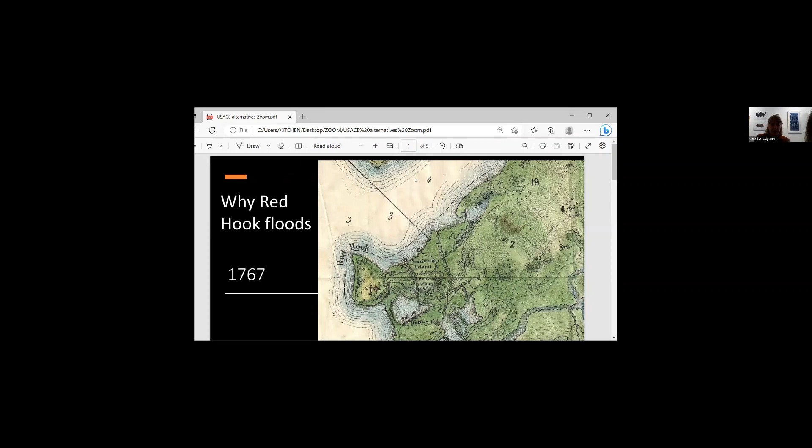So Red Hook was Lenape territory, settled by the Dutch just seconds after Manhattan, New Amsterdam. And this map from 1767 already has a bit of Dutch influence in that running right here, the Dutch made a canal because they used waterways. And they made some mill dams, but this shows you the amount of water within inland Red Hook.

But Red Hook's current shoreline has expanded. And so what this means is we're very low lying, and in some of these mill ponds, there was fresh water as well as salt water. So we are at risk of seawater flooding.

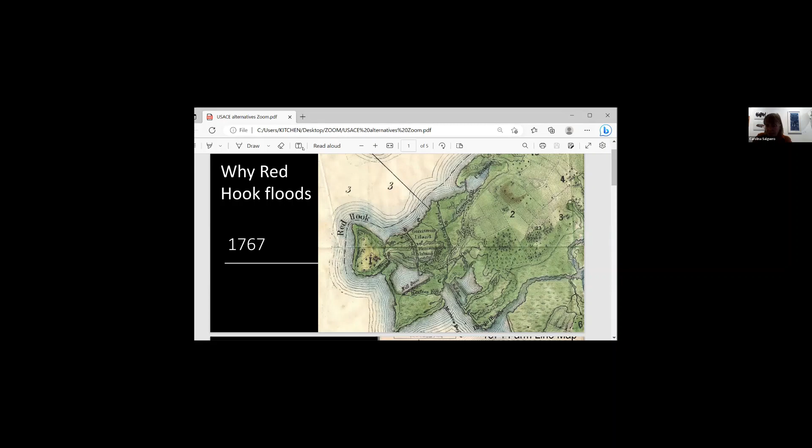And then here is actually, I'm not sure if they're seeing mine on top. No, I don't want them to see that. I just wanted them to see the PDF, which I've lost now. I'm used to working with two large monitors, not on a laptop. So this is

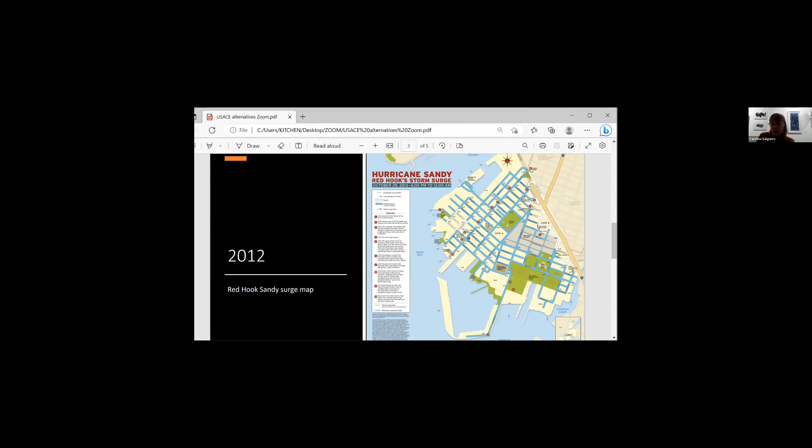So when Hurricane Sandy happened in 2012, everything that's blue on the street is what flooded. So the only parts that did not flood in the peninsula are this, the former Cypress Island, right here, and a little bitty spot right here where we had our Sandy aid station, Red Hook Initiative, right over here at the edge where the highway, the BQE, is.

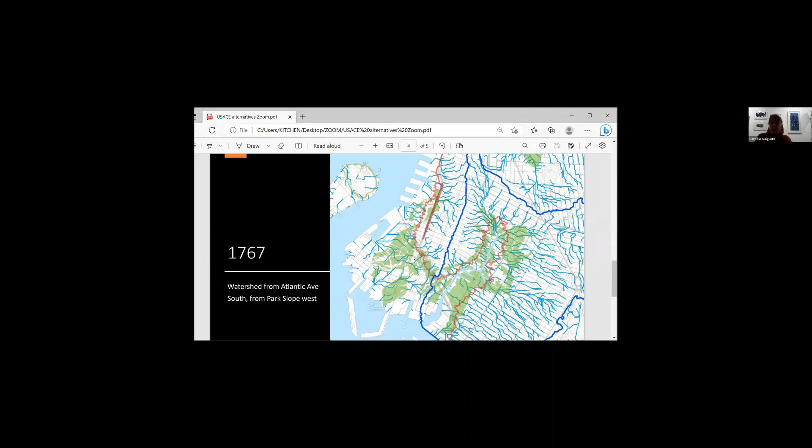Essentially, the whole peninsula flooded. Now, this here is a watershed map done by one of our advisors, Eymund Diegel. This shows all of the freshwater, or by his best estimate, freshwater streams in Red Hook. So many old timers know that Richard Street used to be a stream. Basements in Pioneer Street have flooded for a long time. Coffey Park was a pond until 1880 something. So those are freshwater issues.

And then here we have the sewer shed, the blue line. So if people are not familiar with the term sewer shed, like a watershed, it represents the network of where the water, in this case man-made pipes, the water routes are. Red Hook being at the bottom of the very high hill that characterizes Park Slope and a whole part of Brooklyn, the sewers are designed so they collect the water up there. It comes flowing down to the Gowanus Canal, where a lot of it emerges. But when there's what they call a rain event, heavy rain, then it comes down to Red Hook.

The city had planned to have a wastewater treatment plant in Red Hook, which is why this big pipe comes down here. The community fought it, and so now the sewage is pumped up to the Brooklyn Navy Yard, up the shoreline. And what this means is that Red Hook is at risk of flooding from all different directions. So we have the seawater that comes in from the sides. We have the rainwater that comes from above, with climate change heavier and heavier rains. We have groundwater that can come up from underneath. And then we also have the sewage water.

And so when there are these big events, there are actually geysers of sewage that come up in some locations in Red Hook. During Sandy, the sewage burst into people's homes through the toilet. And I spoke to someone in maintenance at our public housing here in NYCHA, New York City Housing Authority, for those of you who are not local. And he told me that groundwater came up into the NYCHA development for 4 days after the storm. So that's some idea of our risk.

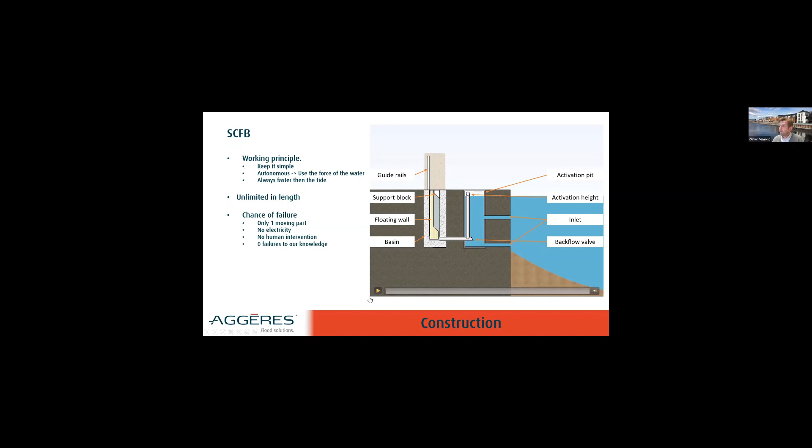So once the water starts moving, as long as the tide remains between safe margins, nothing will happen. At the bottom here, there is a non-return valve, so the water cannot enter the system when it's not needed. But we designed a prescribed height at which the barrier should be activated. So once the water only exceeds by 1 centimeter or one inch, the whole system will flood from the bottom and the floating wall will rise.

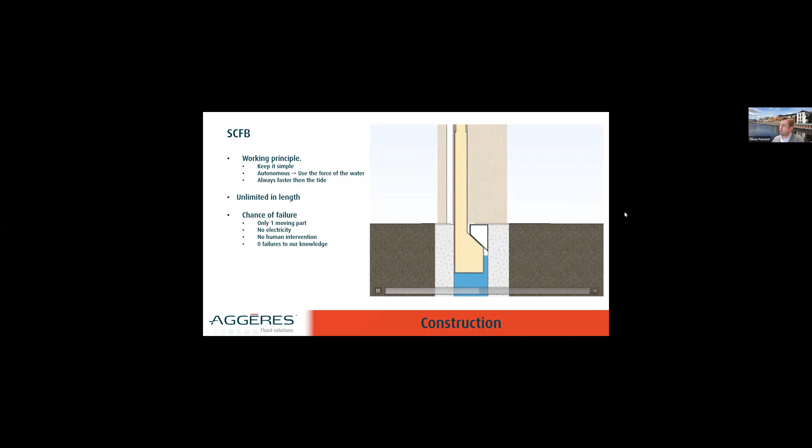The mechanism of the floating wall, it's hinged at the bottom. So all the forces that are exerted by the water are directly put into the foundation at the bottom. That means we can design if the barrier is 1 meter in length, or it's 100 meters, or a mile in length; it can be designed as long as you want it to be.

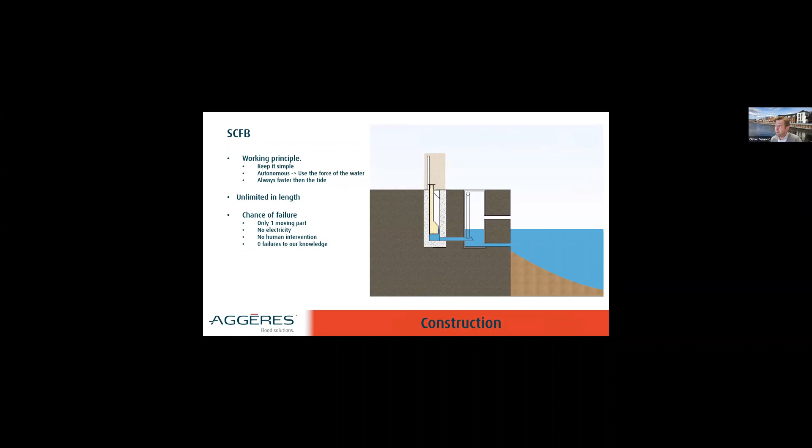And the best part of the system is we only have one moving part. So we get the lowest chance of failure. We don't use any electricity under normal circumstances. There is no human intervention. Nobody has to push a button. So you exclude all the parts that can lead up to failure of the system.

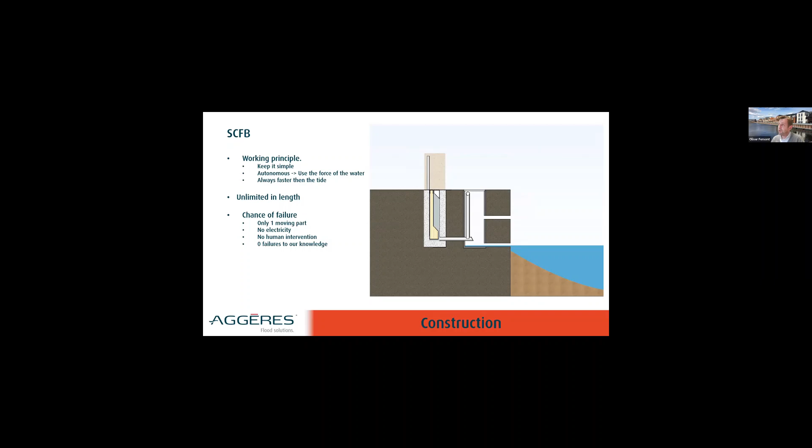As you saw in the diagram, once the tide recedes and we go back to a low water, the barrier itself will lower because it drains, and we'll go back to sort of a reset and be ready for the next high tide. So we have standard heights; up to 6.6 feet are more or less the standard heights. But we've done project calculations where we can build the barrier system easily up to 13 feet.

It's a composite wall, so the floating element is in composite. It's a glass fiber foam core composite. And it's usually location-specifically designed. One of the rules, more or less, is that its depth into the ground is more or less 1.5 times its retaining height. So when you've got a 1 meter high barrier, we go more or less 1.5 meters into the ground. Most of the material used is very durable, and we design the barrier for long lifespan.

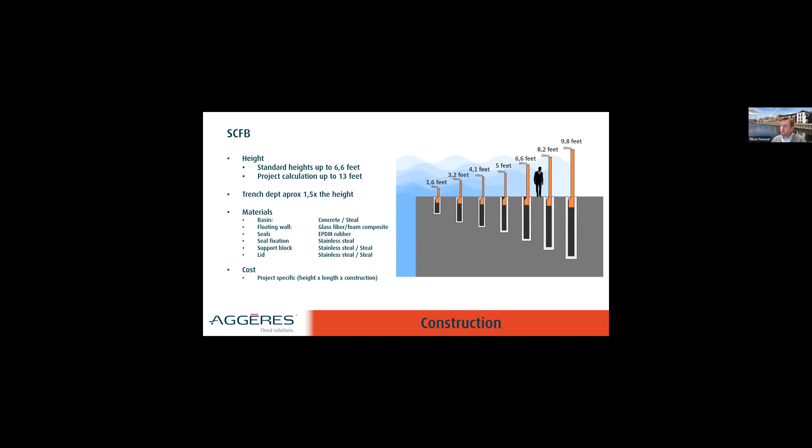The costs, we get a lot of questions. What is the cost of a barrier system? But it's highly dependent on the height times the length of the barrier, and what other works will be done in the region. So even if you have a fixed concrete wall, you also need a foundation for that concrete wall. That concrete wall also will go deeply into the ground. We just changed that concrete wall for a basin system where we put the flood wall in. So it's difficult to compare to other solutions.

In our current projects, we designed the system for 100-year plus design life for most of the parts. So for the basin in concrete, we take 100 years. The floating wall is in composite because it's 99.99% of its lifetime underground with no UV light from the sun. We can guarantee a very long lifespan, and most of the other parts are usually in stainless steel with a long lifespan. Only the rubber seals and valves need to be looked at and probably changed every 20 to 25 years.

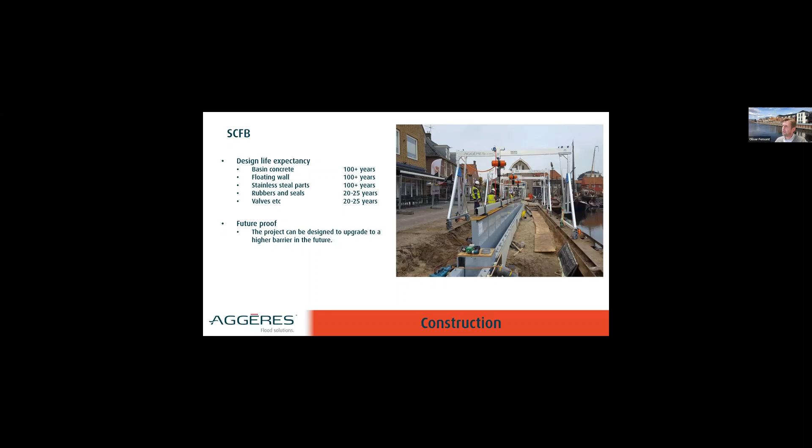For future-proofing a system like this, we can design in different factors. We could imagine that from now up to 2050 we need a barrier that has a 6 feet high retaining height, but after 2050 we would have to go up to 9 feet. In that case, we can already design the concrete basin for accepting a higher wall in the future, so that in 2050 you could take out the lower wall system and put in a higher wall system without having to redo the foundations and the basins.

We've been working with the product for quite some years. We have quite some experience. So we can deliver together with our partners most of the services. We start at the design and engineering part, where we do preliminary research and cost assessment, where we can go into BIM integrations, RAMS risk assessments, composite calculations, where we could actually do most of the work to see if it's feasible to put into a certain project.

From there, we can step up to do all the production works for the floating wall. Usually we do everything which is movable that we put into the ground, and concrete basins and all those things are usually done by local contractors, for which we will produce production drawings and all those things needed. Installation-wise, we usually do site survey, assembly of this floating wall and installation on site if needed. Maintenance: in Europe at this time, we have most of the maintenance contracts.

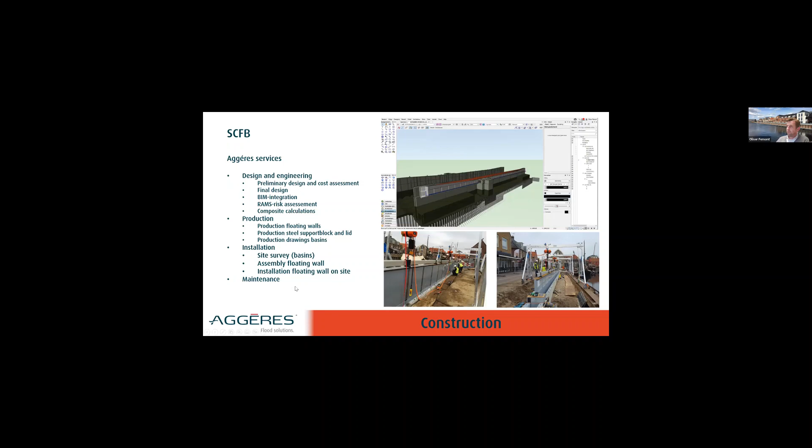Activation. So we designed the barrier to be activated by the floodwaters, but that's not the only way you can activate the barrier. It's actually pretty easy to just fill it with any water which is at hand. So it can be easily filled by, for example, the fire department, by just pumping water from the canal or from any water body into the system, or to use city water to fill the system,

or push button operation if the client would need to just push a button and have the system come up. That can also be designed, always taking care that we don't get off the path of the basic idea, where a flood will always activate the system. So we have different options of activating the barrier, but the first option, where it's activated by floodwaters, still remains its latest redundancy.

In all the designs, we incorporate different redundancies, so we make sure that we have different water inlets. Those are all interconnected. So if one or two or three inlets would be blocked by debris, for example, from 10 inlets, we only need one inlet to have the whole barrier system come up and make sure that the hinterland is protected.

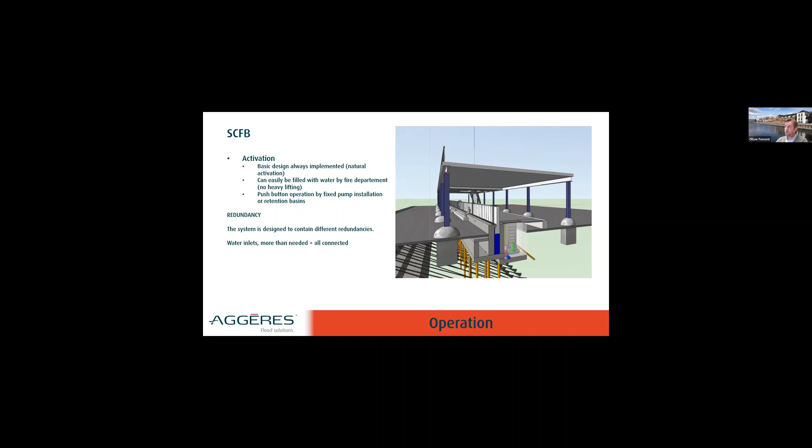Basically, we design the floating wall. It's a composite wall. It's designed specifically for hydraulic conditions that appear on specific sites. So most of them are tailor-made. Our standard elements that go into underground parking garages are usually designed up to more or less 2 times the pressure of the static water.

But for a current project we are designing, we're going up to 12 times the static water pressure, which is wave and impact pressure combined, up to 50 kilonewtons of force per meter, which is quite high.

Of course, what happens when something is on top of the barrier? Actually, the barrier floats. It works like a boat. So we can design the floating part, which goes into the water. If we can expect that there will be heavier loads on top of the barrier, we can just make a bigger flotation device, so it will be picked up.

Our standard barriers usually cope without problems with 75 kilograms per meter. So one person per meter can easily stand on the barrier and they will just go up with the barrier. But in some cases, you would like a higher lift capability, for instance, where you could expect that there would be light vehicles or motorcycles on top of the barrier. It can easily be designed to pick up higher loads.

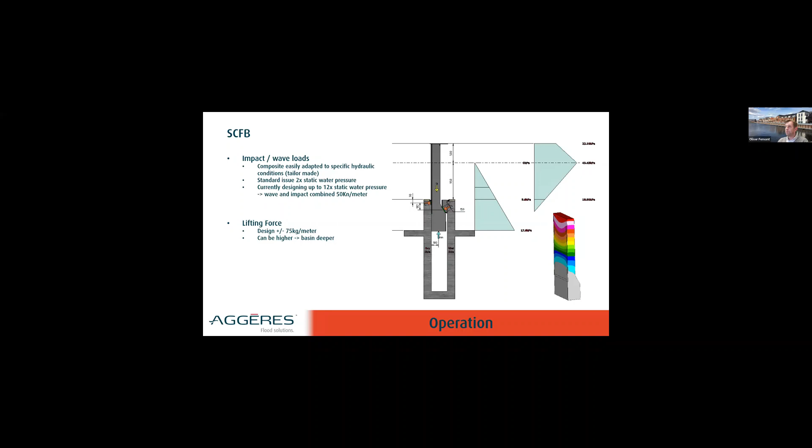I'm already at maintenance. So what's expected for maintenance purposes before a storm or activation would appear? Just a quick checkup actually of the lid mostly. So the barrier under normal circumstances hangs from its lid, and the basin is almost airtight, sealed from the surrounding.

But for instance, when there is a little bit of debris on top of the lid and the barrier comes up, and that debris would fall in between a crack, that could lead to a small leakage percentage. So it's best to make sure that the surroundings are cleaned. And we actually advise to do a yearly or after a flood maintenance inspection. That's usually just an inspection.

And as you see, the inspection is not much more than using a pump or a water hose to fill the system. It will just make the barrier float up. You can easily inspect the seals and make it go down again. The Spakenburg project is a 300-meter long barrier, and 2 to 3 persons can easily inspect and have the maintenance done in one day.

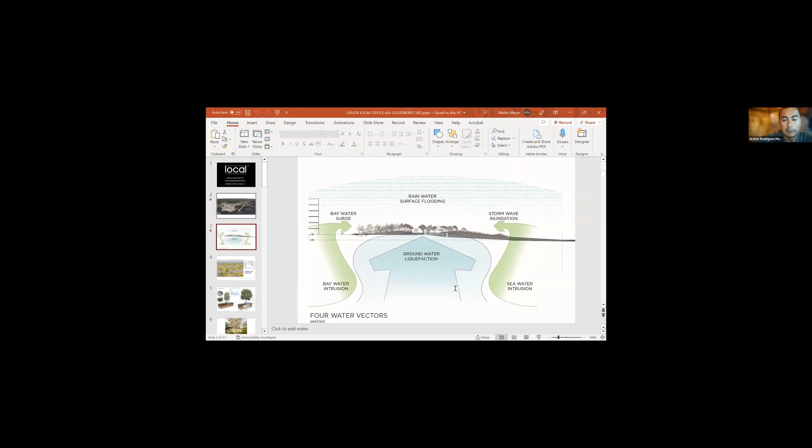I want to add, it's great to see the team at Aggéres present self-deployed barriers. I first saw their technology over a decade ago in New York City, and I'm still dumbfounded that it hasn't been built in any city in the United States yet. We need that technology. I know long-term maintenance is always a struggle in the United States, but we can overcome that. In fact, I've always introduced the idea of surge-powered barriers in the 3 coasts that our firm has worked at, and people get excited, but I think it's time to get some pilots going. So hopefully New York City is the place for that, especially in the Dutch history of Red Hook.

So I'm Walter Rodriguez Meyer, landscape architect and urban designer, owner of a minority-owned business, Local Office Landscape and Urban Design. And before meeting Catalina, what really got us in position to support New York City after Hurricane Sandy is Dan Wiley, who's on the call, who represents Nydia Velázquez's office.

Back in 2007 or 8 or so, Dan and Nydia brought some of the work I'm about to show you to the Congressional Hispanic Caucus, and our firm was awarded Innovators in the Green Economy, and from that time on, it really helped our firm grow in Nydia's district and put us on the radar for the Obama administration once they got going. So I just have to say, I'm always grateful for what Nydia has done for our firm and for minority-owned firms in New York City.

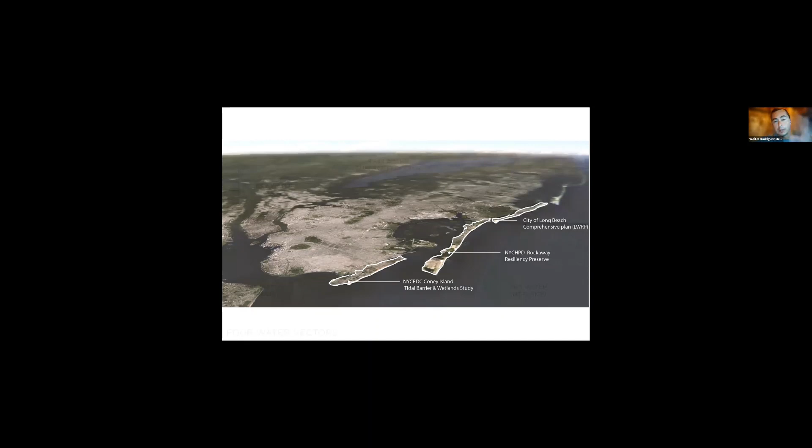In working in coastal zones, whether it's Red Hook or in the Rockaways, it's always a challenge to deal with the confluence of what happens when it rains and you have storm inundation. And that's water from the sky, fresh water and salt water coming together at the same time, which happens during some events such as hurricanes and storm surges. And so one of the challenges is really groundwater management, because the groundwater will rise up because it's fresh water. It'll rise up more rapidly than the salt water because it's buoyant and floats on top of it, especially in the subsurface.

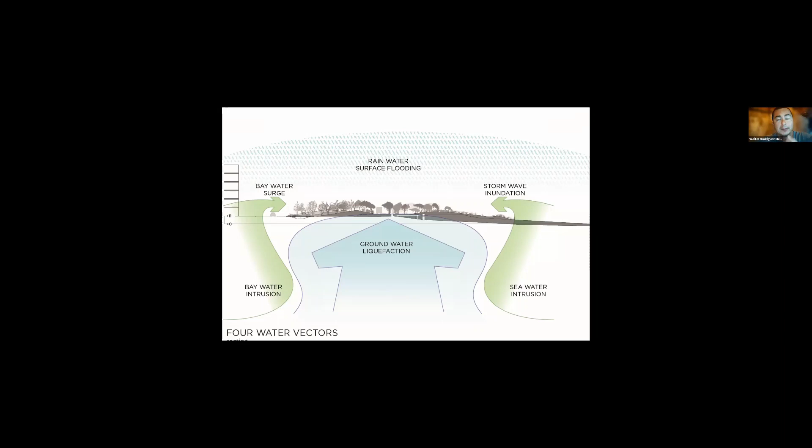And a lot of our coastal zones are very porous. We have very porous geologies in Rockaway with sand, and coastal zones of Red Hook. And so how can that groundwater be managed in a way that is consistent? The great thing is, 1,000 years ago, there was a coastal forest in New York that would lower the groundwater in the first few feet of the groundwater zone. So there was a check and balance system 1,000 years ago.

And so the challenge is, how do we take the way we plant trees today and bring back that check and balance between groundwater and trees? How was groundwater lowered? It was through evapotranspiration. And so evapotranspiration is when the hotter it gets, the more the trees pump water from the ground and help cool the urban heat island effect above.

And so, knowing this knowledge, there are ways to design our soils so that we can supercharge that relationship from 1,000 years ago and actually have our urban forests be supercharged in a way that can handle stormwater, groundwater, and create roughness and surge in ways that is even more improved in performance than that forest from 1,000 years ago.

And this data is based on a few reference points. The USGS has noted that a mature tree can put 109 gallons per day from the groundwater into the air, but that's mostly temperate trees.

Now, we've learned in the tropical environments, with groundwater sensors placed in the tree islands of the Everglades by Florida International University, the groundwater is lowered by 1/4 inch to 1/8 inch per day, which doesn't sound like much, but when you add this up, it starts to add up to millions of gallons per day when you have a forest that works in this way.

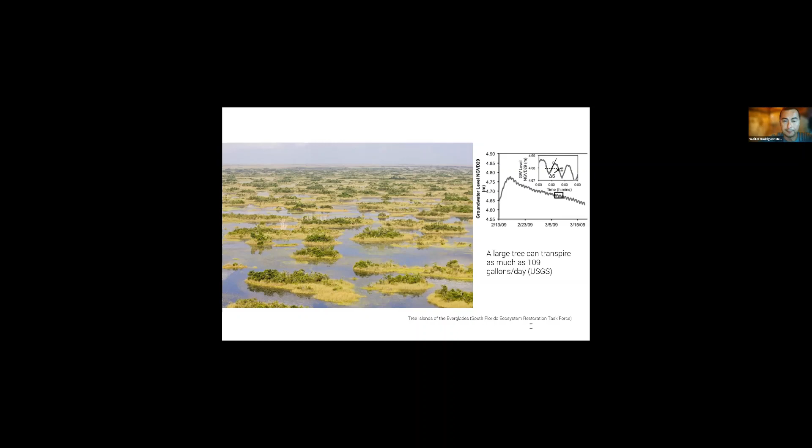And so the way we plant trees today, kind of on the left, it creates some hazards in the urban environment. When trees knock down in storms, they lift up sidewalks, they create disaster recovery budgets that get blown. And most importantly, the trees are not connected to each other and they're not connected to the groundwater.

Whereas on the right side, if we design our structural soils in a way that are hydrologically connected and networked to each other, trees can hold each other up by connecting to each other in winds. They can share nutrients and they can lower groundwater as well as cool the urban heat island effect at scale.

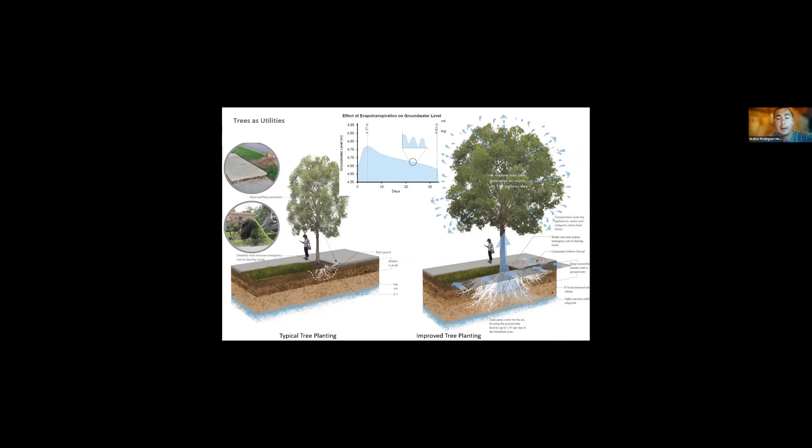And so the good thing is these cloudburst strategies are being built by the city in the future, and it's happening in higher elevations in New York City. So the DDC and NYCHA are starting to deploy cloudburst contracts where they're managing extreme rains.

But the challenge is most of the green infrastructure guidelines for New York City require 3 feet of freeboard from the bottom of the green infrastructure to the top of the groundwater elevation. That means that you need a 5 to 6 foot freeboard between the street level and the groundwater, which basically eliminates most of Zone 1 of New York.

But my colleague from DEP, who works on these guidelines, John McLaughlin, has told me those are just guidelines. They're not regulatory. And yes, the city is working uphill with its pilots, but it'll start moving its way downhill.

And so some of the projects I'm going to show you now are pilots that have been built in New York that have been tested by extreme events of groundwater flooding and nuisance flooding, as well as extreme rain events like Hurricane Henri and Hurricane Ida that came through a couple summers ago.

This first project is on the coast. It featured a new urban dune forest built behind the boardwalk in Rockaway to create roughness and friction so that if the seawall and the boardwalk, which are designed for a 100-year surge event, are ever compromised, if there's a surge that came over the boardwalk, the forest creates another layer of protection and friction, as well as the topography.

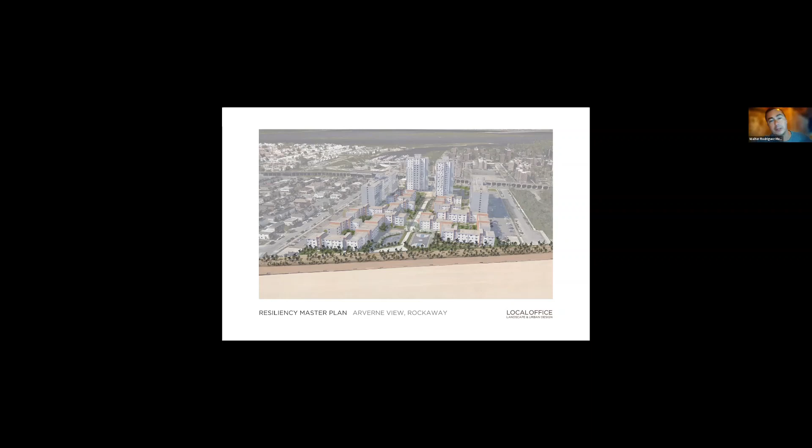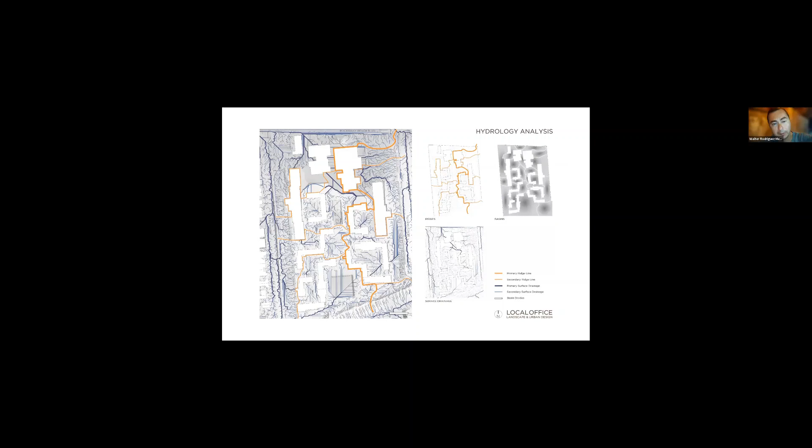But on these microsites, working at the multiple block scale, we run these heavy rain events and map where water goes and where it collects. And this tells us where the strategies for intervening go.

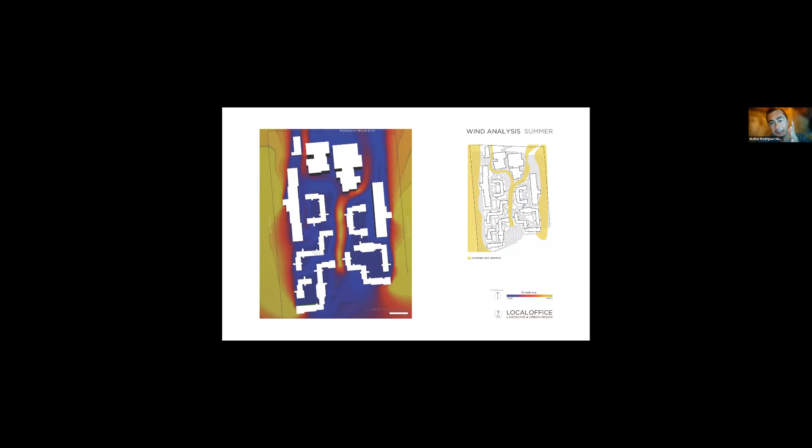Also mapping how we look at extreme winds from the summer versus the winter, and how that affects the existing landscape. Now, what we found on this project is the existing landscape was getting impacted by salt summer breeze that was coming in from the ocean. And without a healthy forest, you can't get these protection systems.

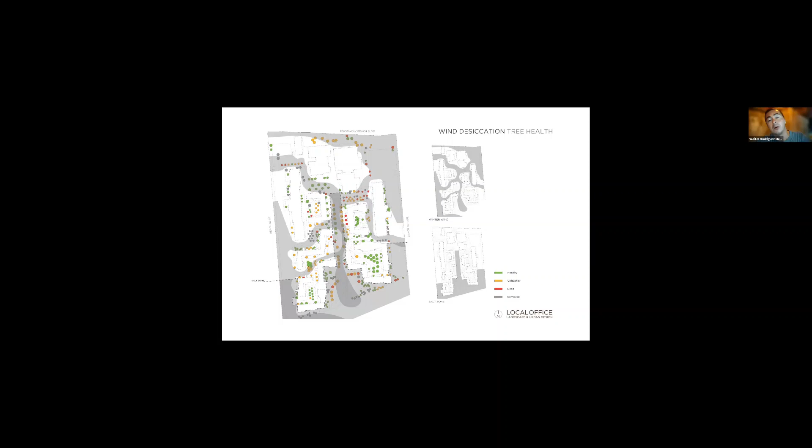What we learned is that salt was going much deeper into the blocks than expected. Also, the harsh northwest winter winds made it hard for senior citizens in these affordable housing complexes to get around in the winter.

And we had a lot of flooding and ponding that would harden up into ice. They had a double whammy here of wind and water. And this project was funded by HUD, federally funded. And this was a $4 million resiliency project. And this diagram you see here took all the vulnerabilities of the site. 4 million wasn't enough to solve all the resiliency aspects, but this prioritized.

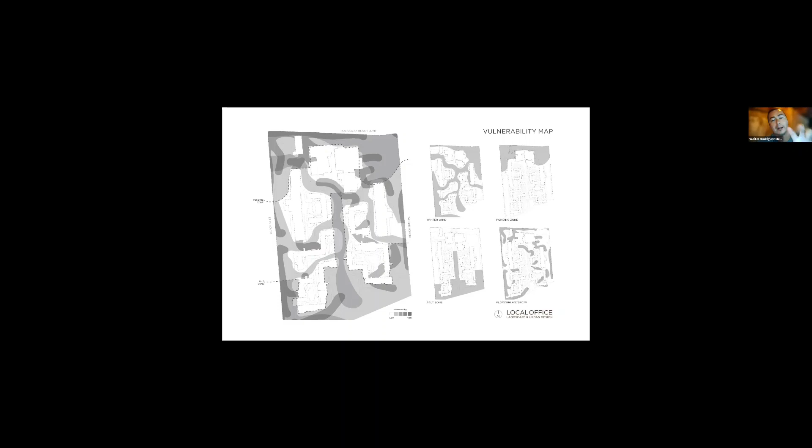And instead of landscape that frame views, we started to create a landscape that moved the wind area up so that that Venturi effect of high winds would get above the canopy and create dense plantings that also were coordinated with the security camera zones that are required for affordable housing projects. And then lastly, a new dune forest between the private property and the public investment from FEMA that was backstopped by the groin field that Army Corps is now finishing construction, but that was under the leadership of Tom Asbery.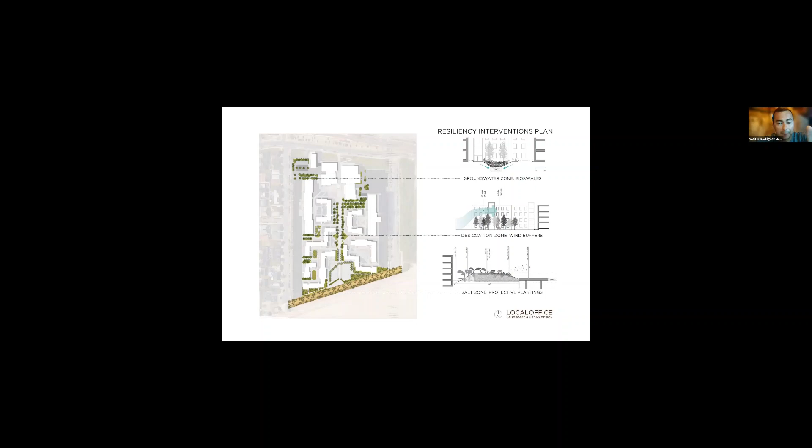And this is what that looks like. The flood management landscape is habitat driven, but it's 50% edible. Thankfully, a lot of the native dune species in New York City are edible species. And this is that dune forest. We work with the U.S. Forest Service to identify species that were native to the U.S. but may not have been planted in this region, to introduce them and document them.

So each of these are mapped with GPS points and monitored over time to see how they perform long term, because some species perform better than others in the face of climate change. There are new pests, there is extreme heat. So some of these species do well in the cold, but not so much in the heat. And so this variability is critical to see, but also not abandon native species and go with the simple invasives that work well, but create other problems. So it's really giving native species a chance and creating diversity as well.

This next project you can read about in Fast Company. And so there's a Fast Company article about Beach Green. Beach Green has become a model for New York City in two ways. You'll find it in the city planning waterfront comprehensive plan that was published last year. But it also was a model for New York City's Green New Deal. It's a built model for Local Law 97, which is Green New Deal. And this is steps towards net zero.

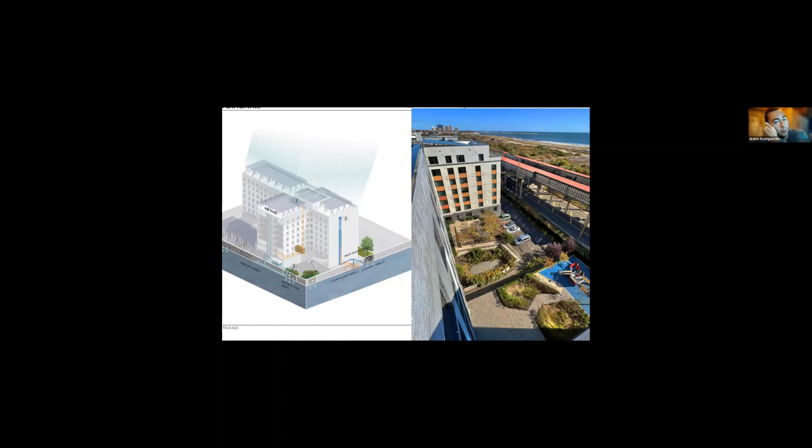So when there's walls to be built, you want to reduce wall linear footage with more natural infrastructure. And this is one of the approaches, is to lower the groundwater over time by not fully requiring pumps. And if there were future flood pumps, which is the case with the Rockaways, the Army Corps plan for the Back Bay includes pump stations as well as levees and walls. How do you take the load off of those pumps? By having the ecosystem take down the first few feet of groundwater during the growing season.

Also, playgrounds can be porous. Every surface can be porous. And there's a lot of ways to execute it aesthetically.

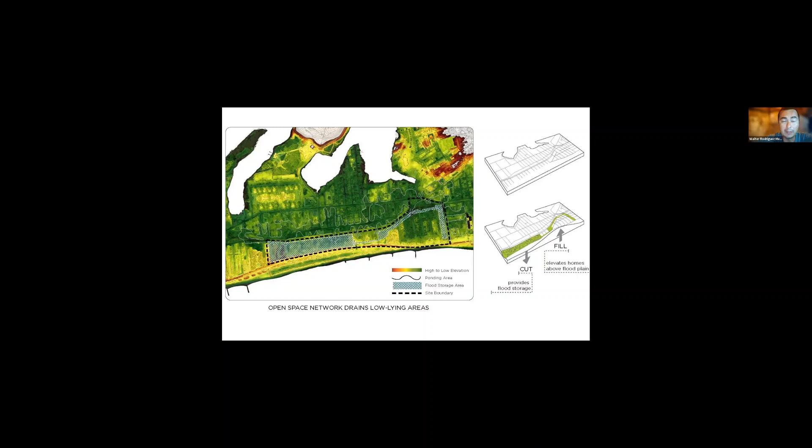And if you want to learn more about it, it's called the Ghyben-Herzberg phenomenon, G-H-Y-B-E-N, and Herzberg, H-E-R-Z-B-E-R-G. Our strategy was to leverage that asset and use the interdunal swales that would be constructed for this project. This is a whole neighborhood in New York City that uses a preserve to become a sponge in a way for the whole neighborhood that exists, as well as a future neighborhood that's being built for the project.

This is a really important detail, because if you look at this on the bottom, you see Army Corps, you see Department of Parks and Recreation, and you see HPD and future grants. This is our big takeaway that we're leaving for the team here, for electeds, for Dan's office. I know Dan is not your district anymore with Nydia, but for Dan Goldman, when he activates with his interface, and all the other electeds, this Army Corps piece that's being funded is one little piece of many other federal investments going on that are interagency in the Rockaways.

And to integrate the investments is critical, because then you start to phase them. So this drawing starts to look at that. Army Corps' investment on the beach that brought us the groins on the beach, and the Department of Parks and Recreation in the middle with the boardwalk that was funded by FEMA, and then future upland strategies that deal with rain. All this needs to be looked at in an integrated fashion that also takes into consideration the election cycles as well as the procurement cycles for the different federal agencies.

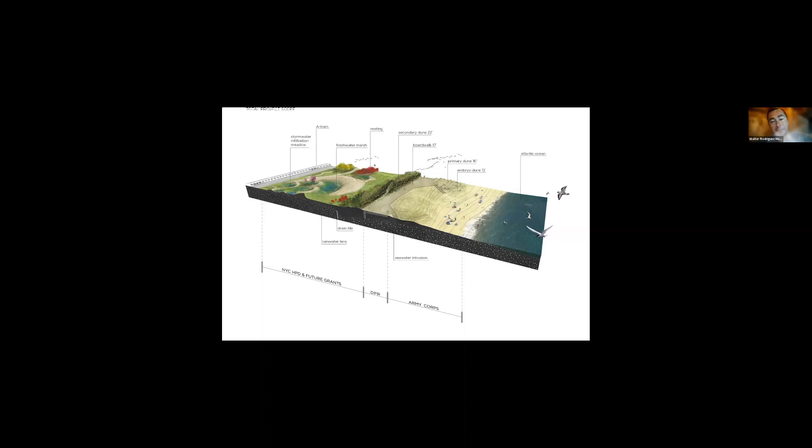So this project is called Arverne East. So it's 90 acres of New York City land that used to be bungalows that were razed by Robert Moses, the city planner. And so a lot of this was rehabbing old infrastructure or demoing it and building a new city. This is a net zero neighborhood, which means all of its energy comes from the site through solar and battery and geothermal district. We've been working with NYSERDA on the very first geothermal district at scale.

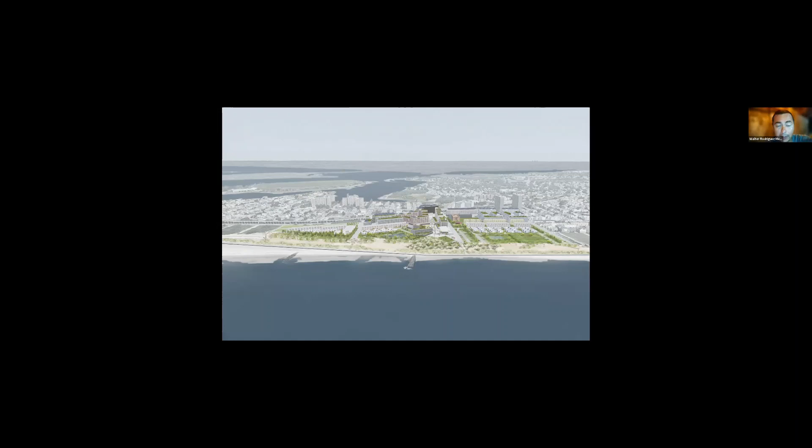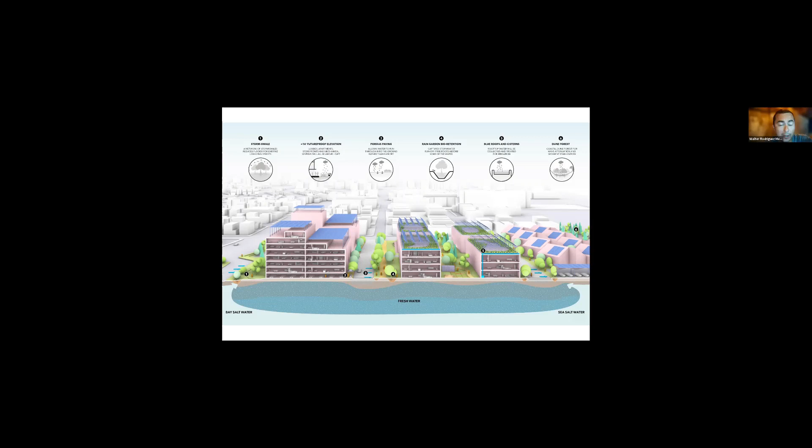And this is going to have a mix of affordable housing and home ownership, both rental and home ownership units, which is very exciting. And shovels are in the ground. It's now being constructed. And we have groundwater being managed at scale, at a whole neighborhood scale, all the energy from each site. So this is decentralization of groundwater infrastructure, decentralization of energy infrastructure. And you can read about this project in Bloomberg. Bloomberg wrote about Arverne East, and there'll be a link dropped in as well about the energy resiliency aspects as well as the flood resiliency aspects.

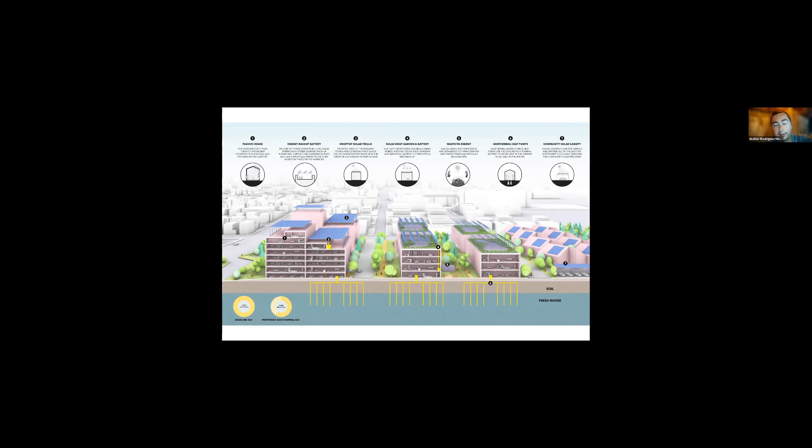This is a multi-billion-dollar real estate project, 90 acres of land. It's the biggest thing since the West Side Yards. But most importantly, it leverages things that already exist incrementally in Rockaways, including a circular economy of farms. This is a farm owned by a Red Hook resident, David Selig, and this is Edgemere Farm. And what's beautiful about this farm is that out in the Rockaways, where he's been doing a lot of work, food is grown here, and then a lot of the restaurants, some of which are Michelin listed, and they're known in Rockaway, are buying the vegetables, and then the waste is coming back to the site by bicycle.

Because there's a bike highway between all these neighborhoods, and that is the boardwalk, right? That boardwalk is a bike highway. So it's a beautiful place in America with a bike highway, with amazing clean air on the coast. And yes, there's a bohemian culture of circularity and waste reuse. And we plan to formalize that with new technologies. So this is using anaerobic digesters to not only compost that waste, but also extract methane from it and generate power to support the net zero neighborhood. The first phases of this project are now starting to be built.

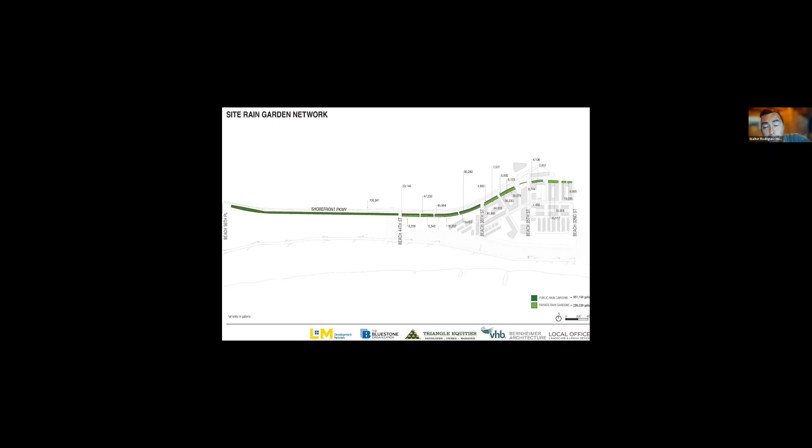And so New York City's future is cloudburst infrastructure. And this is New York City's largest cloudburst street. What it is, that green line is over a mile of contiguous natural infrastructure that can handle 1 million gallons of rain every time there's a rain event, small or large. Normally, that rain would have ended up in Jamaica Bay, which is completely legal, but we went beyond the standard of a 5 or 10-year rain event. We designed for a 100-year rain event, greater than 100, and that's how it looks networked and is contiguous, and it's now under construction.

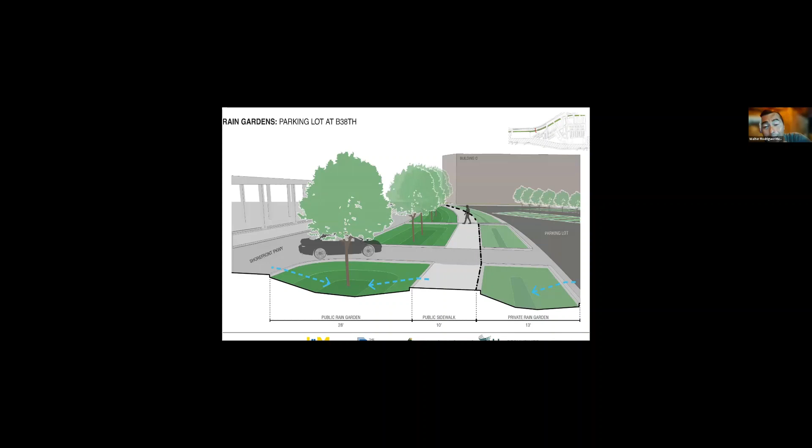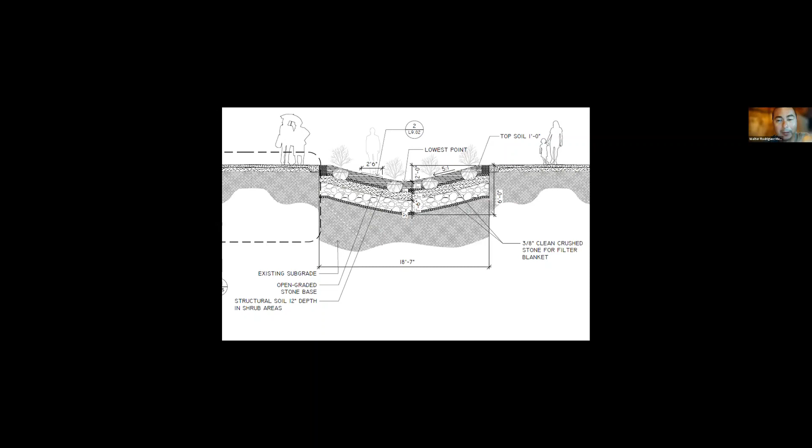And so I have some update images of some of the specifications for that, some of the details. One of the big takeaways was the interagency coordination required to pull together so many jurisdictions, right? In this case, this grate that I'm touching looks very simple, right? It's a cantilever grate over sidewalk. But on one side is DOT property, and on the other side is Parks property. And this is being constructed by the development team who's in a public-private partnership with HPD.

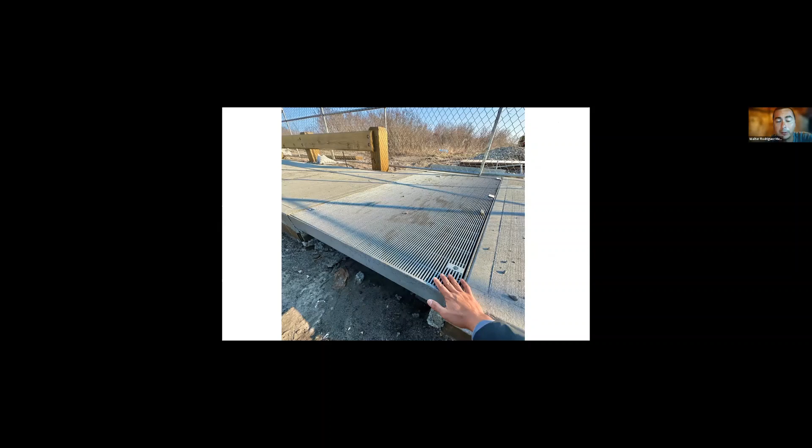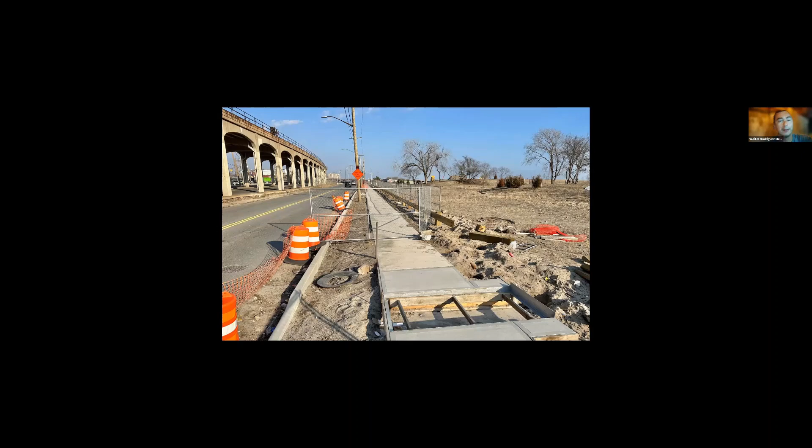It's under construction, so don't mind the mess, but these are just from a couple weeks ago during site visits. And I roughly sketched out all the jurisdictions that needed to come together here, but to the left, we have Department of Environmental Conservation from the state, we have Army Corps, HPD, you name it. As you go to the right, more of the city agencies, but all these had to be coordinated to manage water in an integrated way.

So I'm grateful for the team that pulled this together. It's both city agencies as well as consultants who are my peers and my heroes, including Starr Whitehouse, Laura Starr, who worked on the preserve. But this is a really amazing project. It seems simple, just take the surface water and don't put it in the bay, don't put it in the pipe, send it into future constructed wetlands.

And that building on the left was designed by my hero, Claire Weisz from WXY. Beautiful wood building, all solar, geothermal, and it's a community center that's out on that preserve. The project will feature a lot of the greatest hits of Rockaway. The restaurant row that is in the center will take you from the A train. So you'll go on the A train from Times Square, door closes, it opens in Rockaway, and you see the beach, that fresh air, the salt, and there's this main street of restaurant row that takes you to the beach plaza and the boardwalk.

So I'll leave it there. That's our New York stuff. If we have time, I can show you some of the tested and true projects from the tropics that have even more extreme rain and extreme wind than New York City. In New York City, a heavy rain event might be 2 inches per hour that would shut down the subway, such as Hurricane Ida and Henri, and cause billions of dollars in damage. But in places like the Caribbean, a 2-inch rain event happens every summer in Puerto Rico, as well as in Miami. But I'll leave it there.

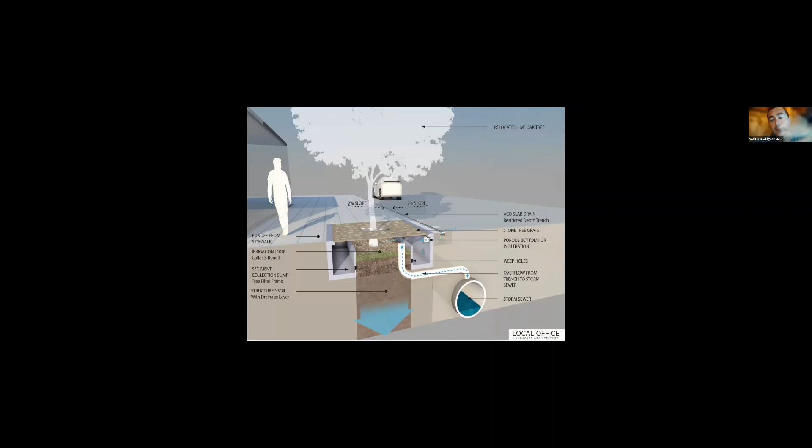Thanks for stopping me. Yeah, this is Miracle Mile, right? This is the overall district. This is the cutaway of the hard infrastructure pipes underneath, and then the new living infrastructure above, showing that you don't have to spend money underground on pipes. You can spend it on beautiful systems above ground and get better performance than those pipes. This is showing the excavation to have continuous root zone using structural soils that supercharges the capacity of these trees to absorb stormwater. And these tree roots can connect underneath proposed paving.

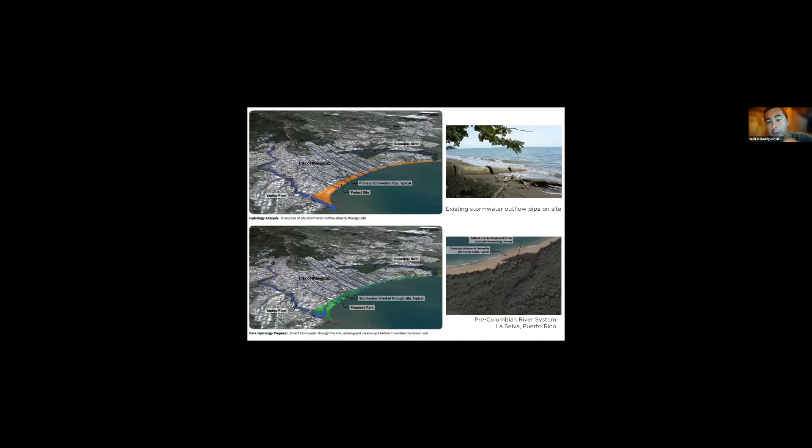So the other piece was I talked about Puerto Rico. The Architectural Record article covers that. The city of Mayagüez had stormwater pipes leaching into the bay, and this is an opportunity to convert these into wetlands that can handle that runoff. And so we constructed new wetlands, dunes, and a coastal forest planted out over 2 kilometers of coastline. Like working closely with the regional DEC in New York State, for Puerto Rico it is the DRNA, Departamento de Recursos Naturales, to transfer federal guidelines around phytoremediation, or the ability of plants to remediate soil, to Puerto Rico. And this was working with the governor of Puerto Rico at the time.

But the question is, can we do this in Red Hook? The answer is yes. When you look at the Army Corps studies for HATS and the walls, it's really about minimizing linear feet of wall because they're expensive. In this case, we integrated walls as a spine of the project, but the wall is designed to be buried as much as possible and never have to do its job. It's the natural infrastructure in front of it of wetlands and dunes that can absorb that runoff from rains as well as the surge. So it's a multi-layered event, and it was tested by Hurricane Maria, and Architectural Record documents some of the benefits from Parque Litoral.

Now this sheet pile seawall you see in the background, in a perfect world, would have been a deployable seawall, and would have had lower elevation visually and been a little more discreet and hidden, and had more park and less hard infrastructure. But that's the next project. We're going to bring that in, I hope.

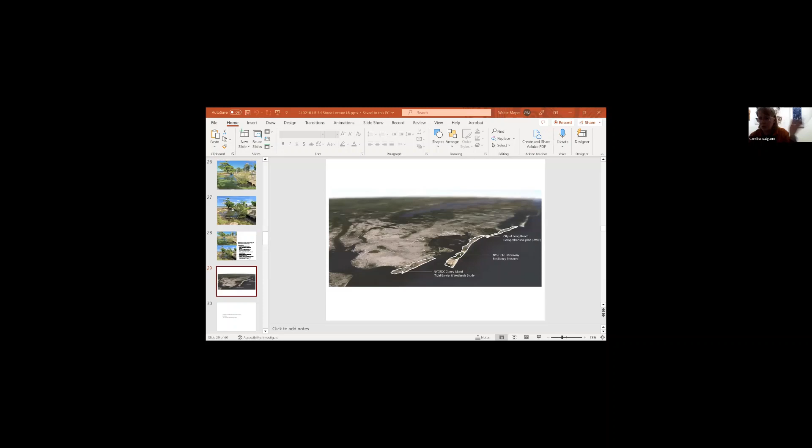Okay, then I think actually, Walter, that would be a wrap for your section. And we're going to switch over to a proposal that we're going to show via video. So this was an Alex Washburn project with people working for him. A completely different version or solution from the other two proposed. Now it's a barrier island called Red Hook Island. And we had actually found, PortSide had found evidence of a prior plan, and so did his team. I think it's 1921, when there was this proposal to have a barrier island, a development off the Red Hook shore.

It wasn't completed. Actually, it shows up in Red Hook Water Stories with the interviews with Don Horton as Red Hook Flats during World War II. And I guess, Peter, you posted something in the chat, but subsequent to the original approval, there were two other... 1930s airport. What's the other one? Wow, Dodgers out in the water. I mean, I missed that somehow growing up in Brooklyn, but there you have it.

And so his team found this, and so his proposal is based on the idea of protecting Brooklyn. He says, if Brooklyn's at risk, what's the answer? More Brooklyn. So it would make it not solely a natural island that would have some park in it, but actually use the real estate developed on this barrier island to pay for the whole thing. So it therefore has no cost. So Peter, let's see if you can let that run. Thank you.